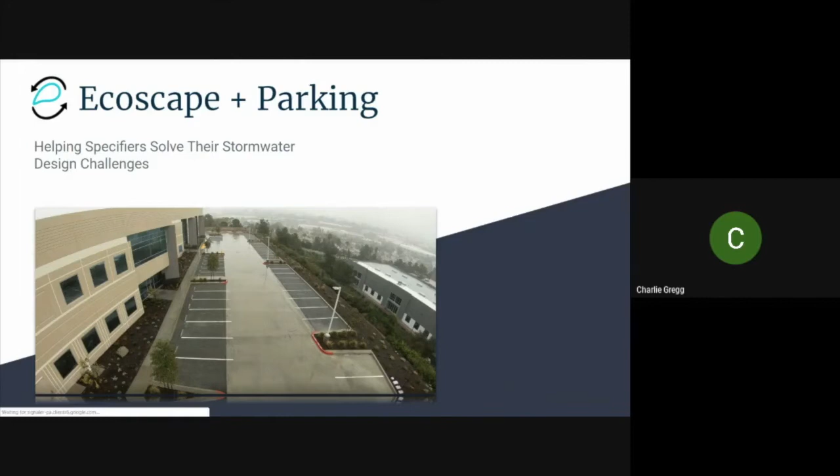This is going to be about a 15-minute presentation, a brief overview on how Ecoscape permeable parking can help you mitigate the challenges that arise from stormwater ordinances from municipalities.

We're going to start out briefly and tell you a little bit about what Ecoscape is. Ecoscape is a patent pending and climate smart spray applied permeable concrete pavement system that was designed a few years back, specifically to meet the challenges of one of our owners who was also developing build to suit commercial tilt up buildings. He was having a lot of challenges in the parking realm with bioretention and impervious surfaces, so he adopted permeable concrete. The permeable concrete he adopted was a traditional ready mix permeable pavement, and it was not working. He was having failures, raveling, and had to rip out and replace it. So he tasked us with creating an easier, better way of producing a commercially viable permeable concrete system, and that's where Ecoscape came into play.

What we're trying to do with Ecoscape is help owners and specifiers mitigate the impact of stormwater ordinances. We're starting to see more and more ordinances and regulations come out relating to stormwater. They're charging stormwater development fees up front when you're building your projects. They might be charging stormwater parcel taxes throughout the life of the project, where they have you calculate your impervious square footage, and then charge you for the water you're producing that they have to process through their stormwater system.

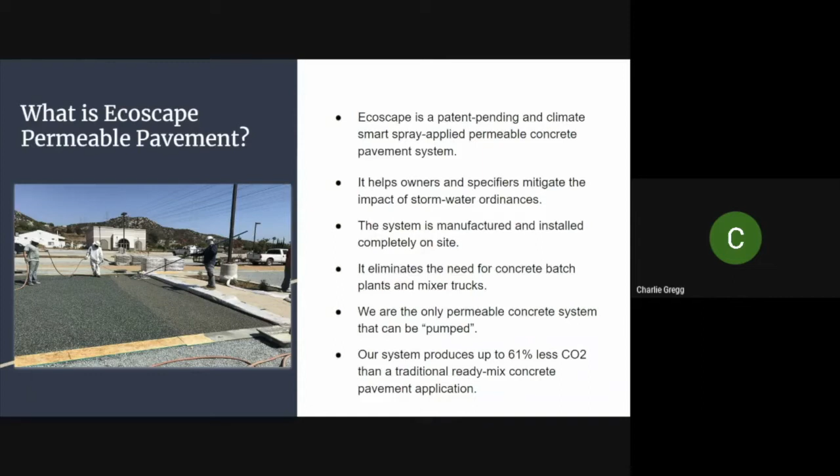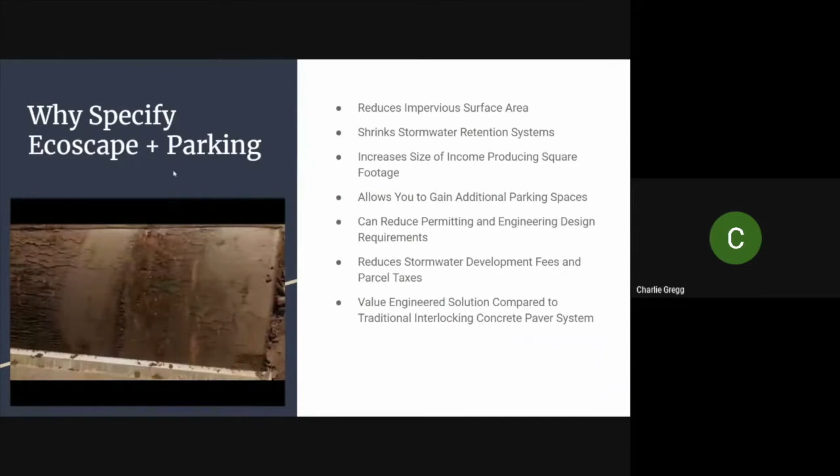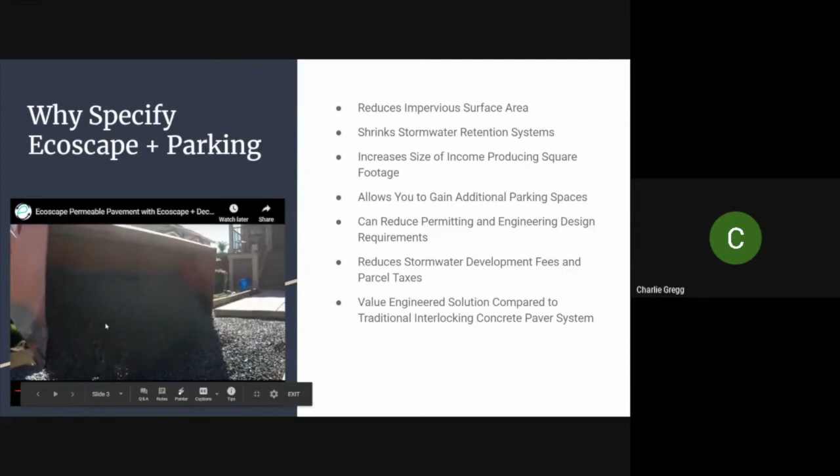Now, why would you want to specify Ecoscape Plus Parking if you were a civil engineer working on a project? As you can see, there's a video here that shows the overall process. But basically, what we're trying to achieve is really three or four things on every project: we want to help you reduce your impervious surface area, shrink the size of your stormwater retention system, and increase the size of your income producing square footage.

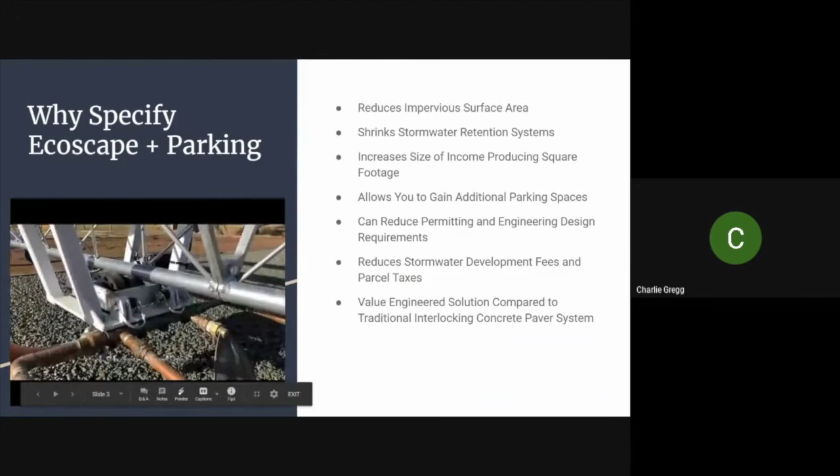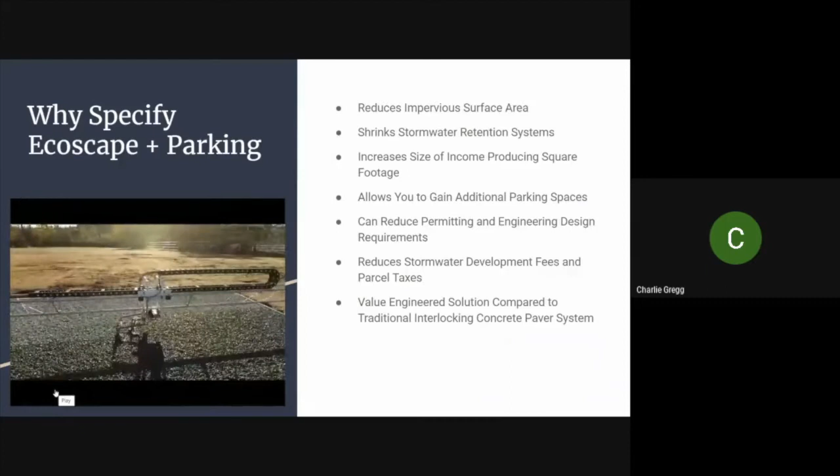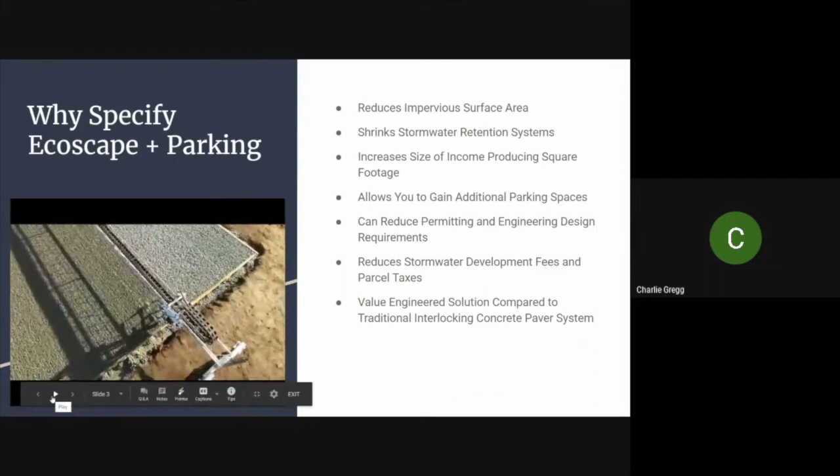Typically, when you're speccing out permeable concrete parking, you'll have a situation where you have a certain size building and you have to have a certain amount of parking spaces, but you don't have the ability or the land for the stormwater retention system that you need to hit your numbers. So what we'll do is replace the impervious parking spaces with permeable concrete parking spaces. For every square foot of permeable parking spaces we install, it allows us to shrink the size of our bioretention up to 5%.

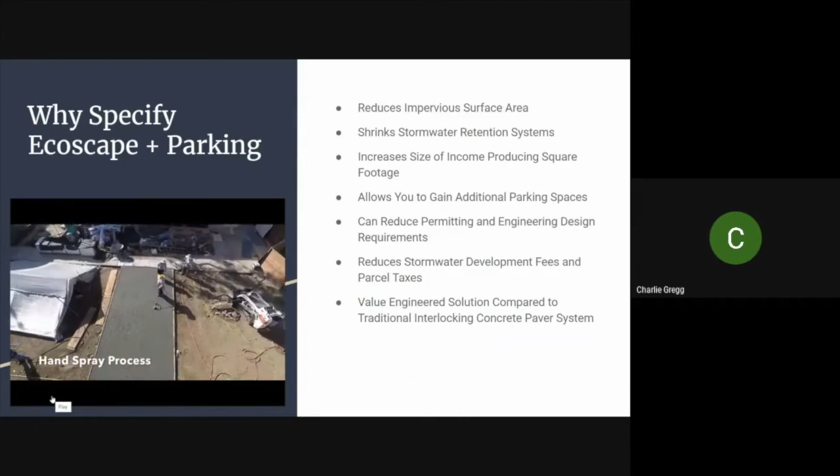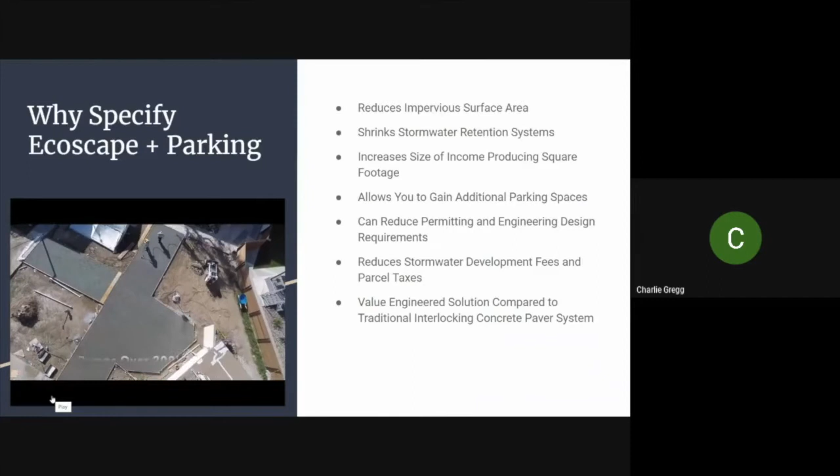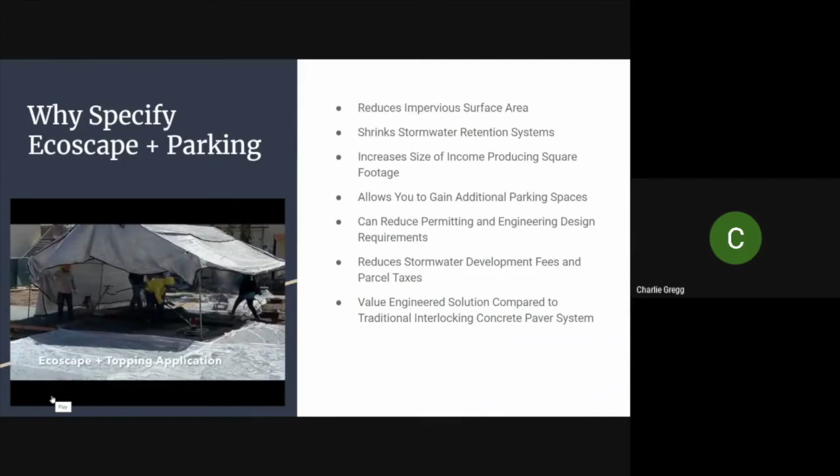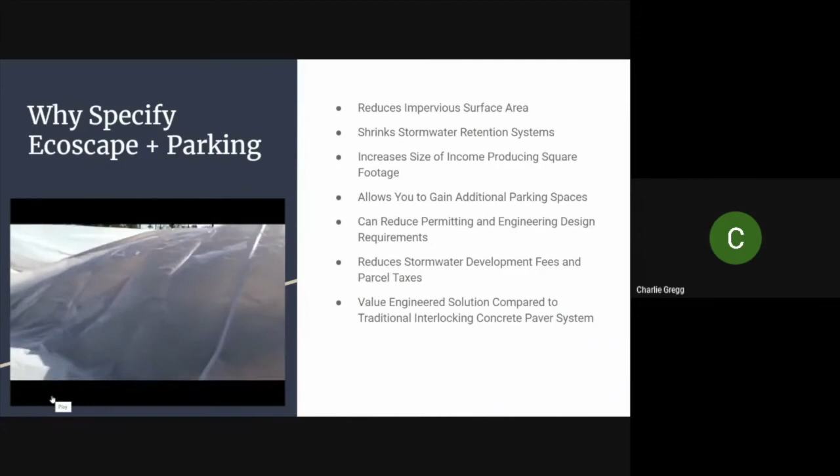Now, by doing that early on in the design process, by shrinking the size of my bioretention and replacing my impervious parking with permeable, I can then do a few things. I can add additional parking spaces to help me hit my numbers for my occupancy permit. Or, the area I was traditionally going to carve out and set aside for retention systems could now be additional square footage that I can generate more income on if I'm leasing the building to a client or tenant. Or, if you're building it build to suit for yourself, that additional square footage could be used to increase the amount of income you're generating in your manufacturing process.

Another thing that we really like is the ability to reduce your stormwater development fees and parcel taxes. And I touched on this earlier.

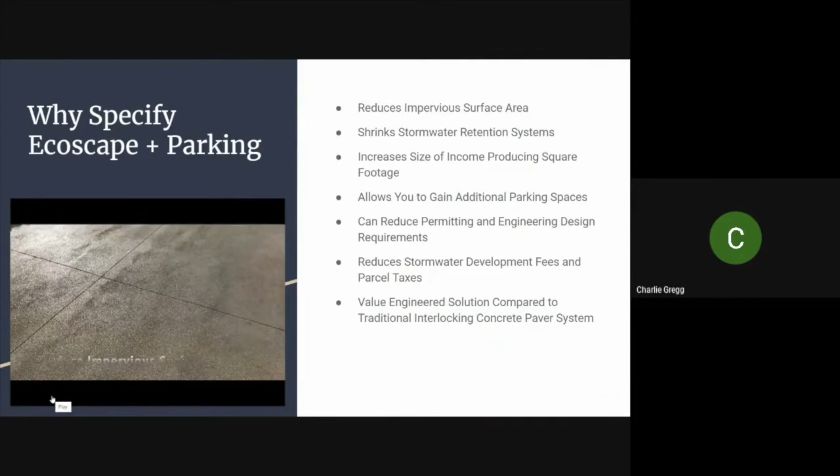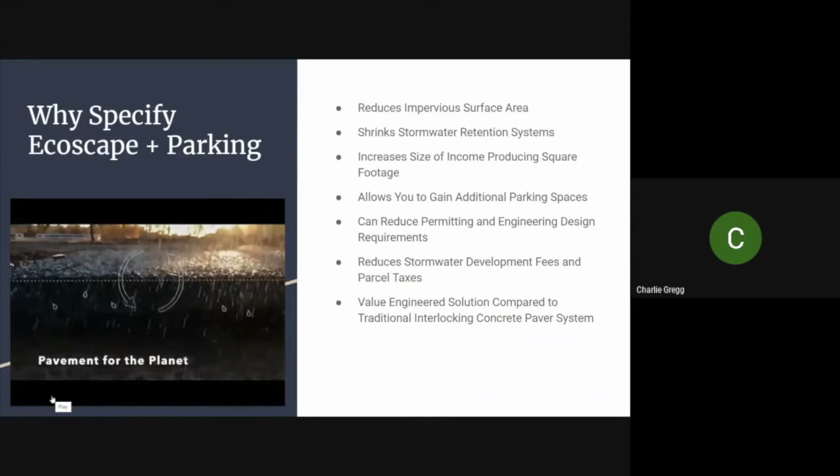We had a project recently with a church that was going to be charged a stormwater development fee. It was about a 30,000 square foot parking area for the church, and it was going to be an impervious concrete parking lot. The city came in and said they're going to charge a development fee based on the square footage of the impervious parking area, as a set aside for the stormwater that would eventually be generated throughout the life of the project.

So we were able to convert that impervious parking lot and replace it with a permeable parking pavement system that totally eliminated that fee.

The other thing we're starting to see, and we've seen this in LA County, is they are annually measuring through GIS the amount of your impervious surface area, and they're charging you what they call a stormwater parcel tax. That tax goes to help fund programs for managing and processing stormwater.

So as we're talking to owners and specifiers, we're saying that by installing a permeable parking lot, not only are you saving on bioretention, increasing parking spaces, increasing the opportunity for income producing square footage, you're going to save on permitting, stormwater development fees, and save your client stormwater parcel taxes in perpetuity. If I can shrink my impervious surface area, I can shrink the development fees and taxes that municipalities can charge me.

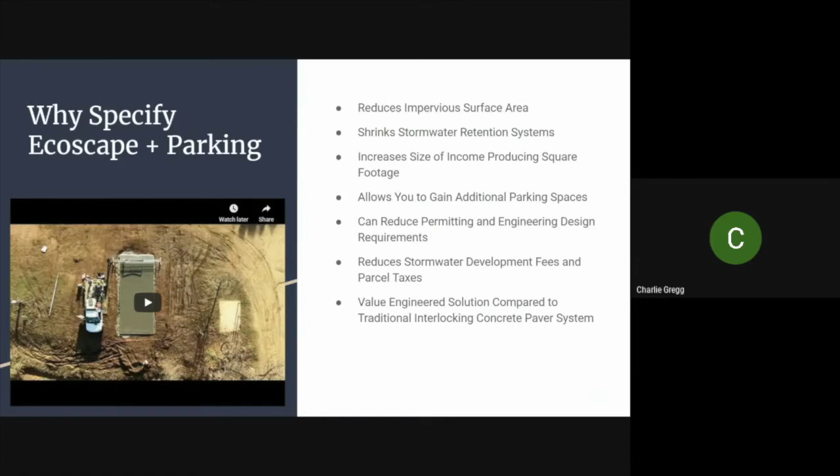Now it soaks all the way through this top layer and binds all of those rocks together. After the spray process is complete, depending on the application, we'll put a vapor barrier on top of that to hold the moisture in so the cement can properly hydrate, cure, and actually be a very strong pavement once the process is complete.

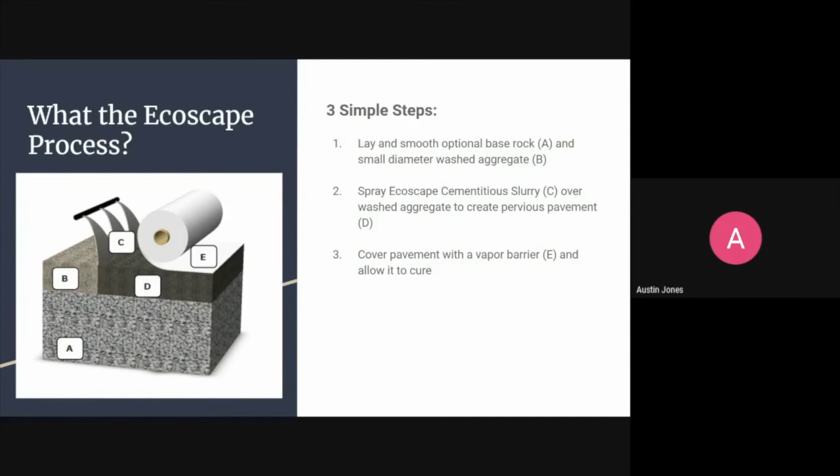So back to the case study Charlie was mentioning, we had a client. They had a build-to-suit building, and they went ahead and maximized the capacity of this lot to its full potential. They had a very large building, as small a parking section as they could, and as small truck docks in the rear as they could.

And it was 90-95% concrete all the way around the property. In order to do that, they actually had to put in, this is at the start of the project, this massive retention basin. This ended up being about 15 feet deep and 15 feet wide before being filled with additional media. That required an additional retaining wall to be built, and it even had to have handrails on it for fall prevention. So they had this whole thing designed to maximize utilization of the entire property.

Now, before you can get your permitting for occupancy, you have to have a set number of parking spaces for the building size in order to meet your municipal requirements. The initial design had zero pervious or permeable concrete, and the impervious surface and bioretention systems were maximized.

Unfortunately, as they got close to completion and were starting to put pavement in, there was a design change as the utilities said, hey, we can't run our utilities underneath this bioswale section in the front, because if they need to be maintained, what happens if there's water in them? So they actually had to shrink their bioretention basins. And what that did is it meant that their stormwater calculations no longer balanced.

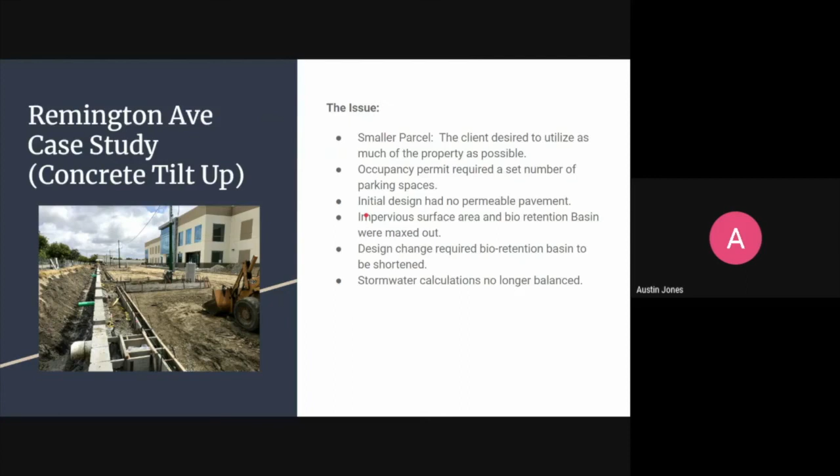They'd already put in all their design, the building was already built. They'd already designed all of their parking. They had to shrink their biobasin. Now what could they do? There was no other option at that point in time that was not going to allow them to get their permits.

So what we ended up doing, I'll show you the actual plans for the building here. As you can see in that photo, this was that street you saw on the left side, continues down to this page, left side again. And this is the bioswale that you could see I pointed out right here and right here.

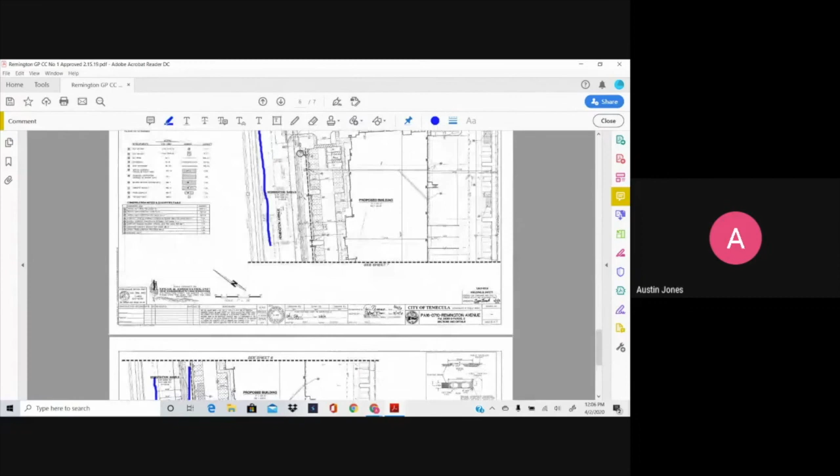So what they ended up having to do is shrink their bioswale right here. So they cut out that section. It was going to go all the way to the driveway on the top side, and they cut out this section. It was going to go all the way to the driveway on the bottom side.

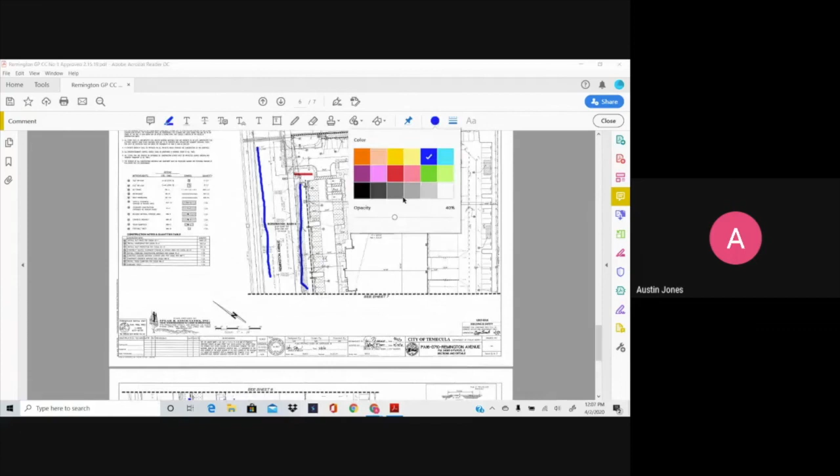And in order to make the stormwater calculations balance, they decided to take just over 6,000 square feet of parking spaces, all these spaces here, and all the parking spaces on the front of the building, and actually turn them into Ecoscape Plus Parking permeable pavement.

So what that allowed this client to do is take a situation where there was really no other option and add the Ecoscape process into there. The biobasin had to be shrunk, everything else was already built and in place. And we were able to come in and, at minimal additional cost and minimal additional grading, install a permeable parking space.

So now any water that falls onto those permeable spaces no longer runs into that biobasin, which had to be shrunk, but it actually soaks straight through the pavement, sits on the subgrade until it eventually infiltrates into the soil and eventually filters and repopulates the aquifer.

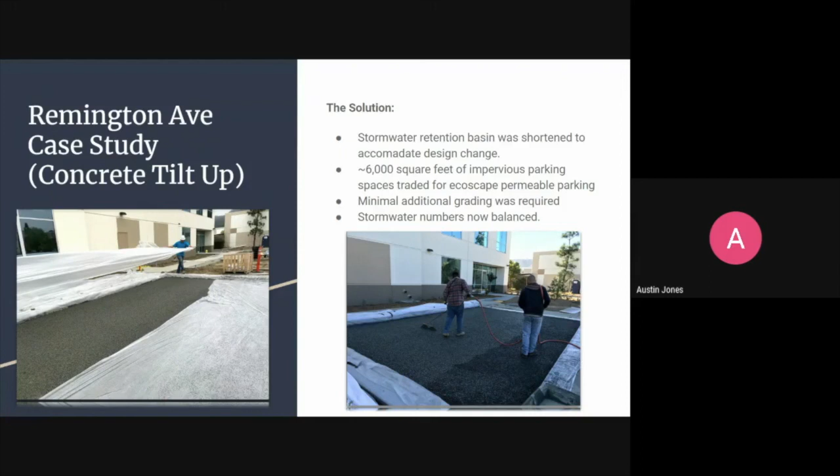So now we have a system where the entire building was already there, our numbers now balance, and we were basically the only solution they had for this opportunity. So the final result here: through our spray process and finishing process, we were able to get all these parking stalls installed, minimal delays on the project, permitting all approved. That building is up and operational now.

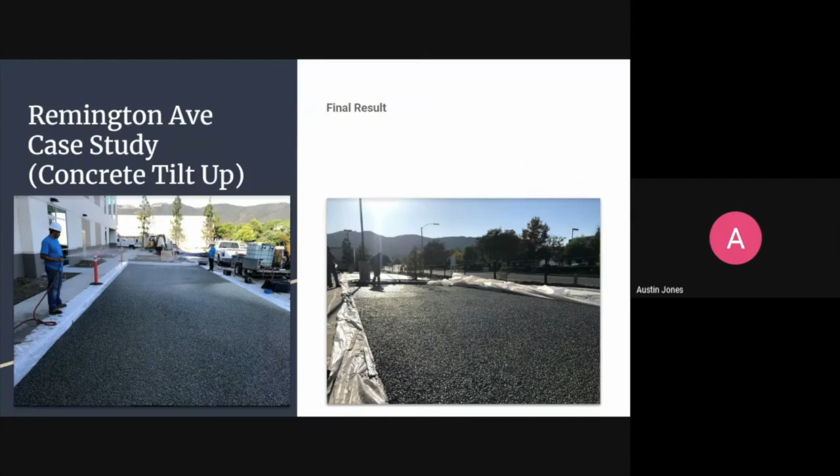Charlie? Thank you so much, Austin.